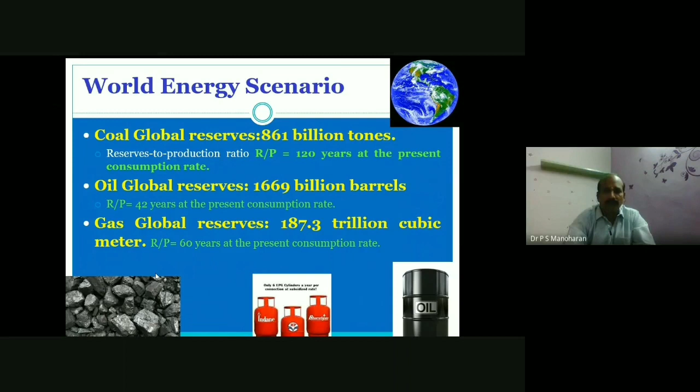And what about the oil reserve? 1669 billion barrels. The reserve to production ratio is only 42 years. Gas is 187 trillion cubic meters. The reserve to production ratio is only 60 years. So after 120 years, there is no coal in hand. After 42 years, there is no oil. After 60 years, there is no gas in hand.

So what about our Indian scenario? The reserve of coal in our India is only 7% at the global level. The coal reserve: United States having 28%, Russia having 18%, and the rest of the world 20%. Our India only 7% we are having. And world oil reserve: Middle East 50%, and South America and Central America 20%, North America 20%. What about our India? Only 0.3% we are having oil reserve.

In Asia, only 3%. In that, India only we are having only 0.3%.

But we are using more energy. So India is the fifth largest energy consumer in the world. First is US, next China, Japan, Russia, and the fifth one is India.

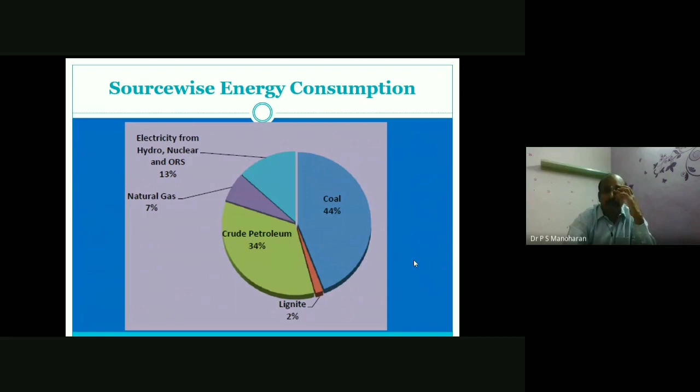Now we are having 44% thermal coal energy, 34% oil, and 20% renewable energy. That is shown here: coal 44, petroleum 34, natural gas 7%, and electricity from nuclear, hydro, and other renewable sources is 13%.

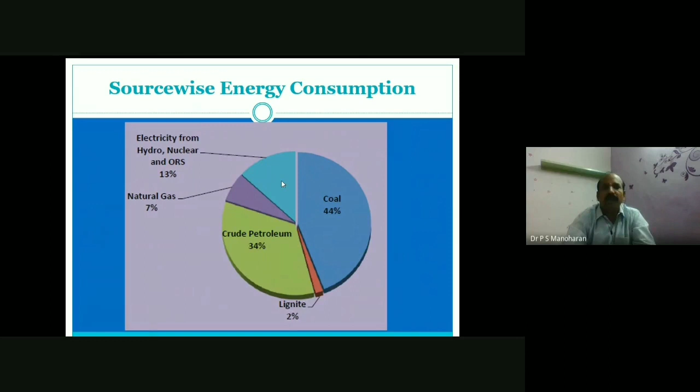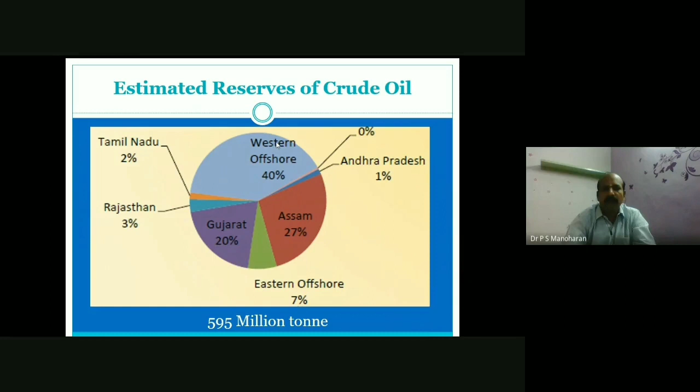Estimated reserve of coal in India is 319 billion ton only, and estimated reserve of crude oil is 595 million ton. In Tamil Nadu only 2% we are having. Most of the oil is in the western offshore, and Tamil Nadu has only 2%.

What about the estimated reserves of natural gas in India? In the eastern offshore, 38% of 1340 billion cubic meter, and in Tamil Nadu we are having only 3% of this.

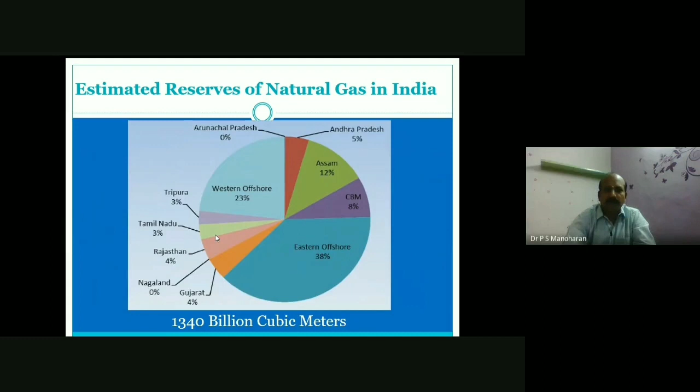So what is the meaning of this scenario? We are having very less oil, very less coal, and very less gas in India. On the 280 gigawatt power, 200 gigawatt of thermal we are using, and renewable energy is a very less amount. In that renewable power, we have solar energy 68% and wind energy 28%, and other small hydropower, biomass, cogeneration is only 4%.

But what about our Indian power demand? Every year it is increasing. This is a growing country, so automatically our demand also increases every year.

Who are the consumers of electricity in India? Total consumption is 11,30,244 gigawatt hour. Most of the power is used in industry only. Second is domestic, third is agriculture, then commercial, traction, and other sectors consume 6% of the energy.

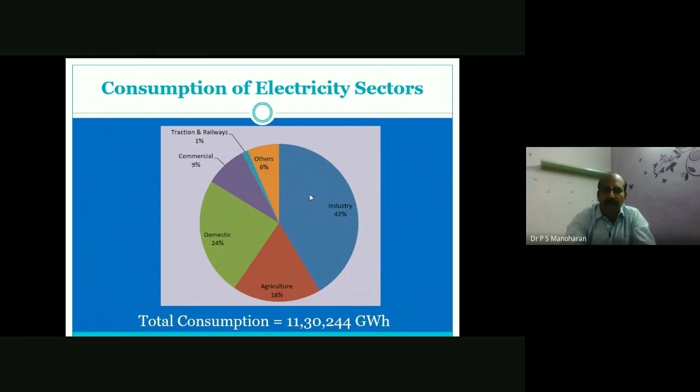So now the demand is high, but the electricity generation fuel is very less. So what can we do for that? Why do we need to save energy?

If you are not saving energy, automatically the petrol and diesel price increases. In the lockdown period also, the petrol and diesel price is now increasing. And the depletion of fossil fuel - petrol, diesel, and coal. The third one is electricity prices rise, because of oil, automatically electricity price also rises. And we feel the shortage of energy also.

In power cut regions, you cannot study, you cannot work. Anything is not possible without power. So this is the energy outlook in India. India has 17.5% of global population, but only 0.5% of world petroleum reserve, and only 7% of coal reserve. So we have to save the energy and save the fuel.

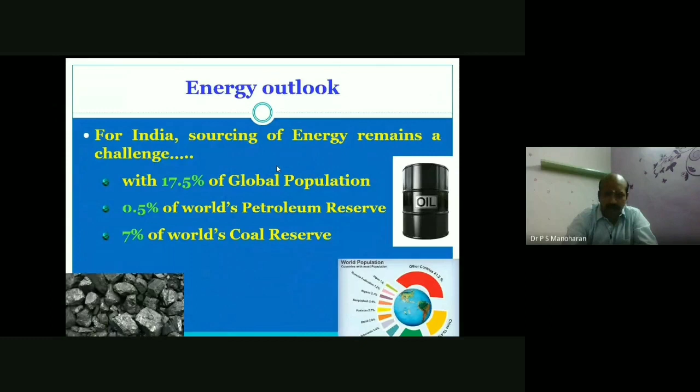So if you are not saving the energy, you have to face global warming and electricity price hike. We have to see one by one. The first one is global warming.

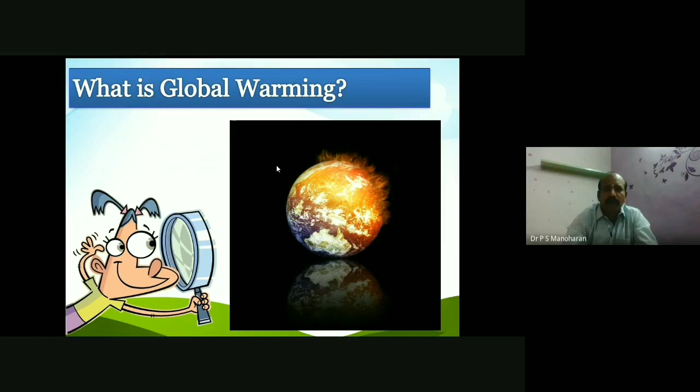What is global warming? It is the increase in the average temperature of the Earth's surface. Why? Carbon dioxide and other pollutants and greenhouse gases collect in the atmosphere and absorb sunlight and solar radiation that have bounced off the Earth's surface. Normally this radiation would escape into space, but these pollutants and carbon dioxide trap the heat and cause the planet to get hotter.

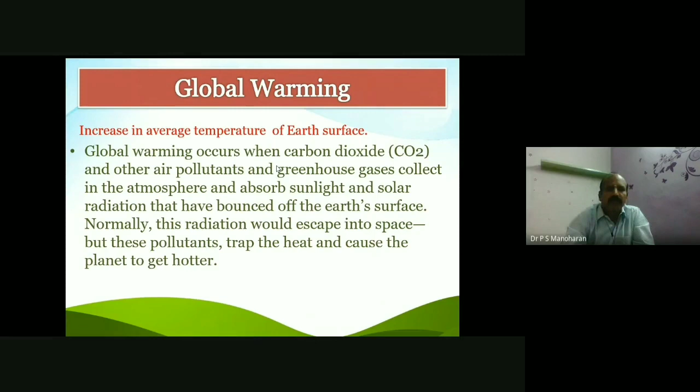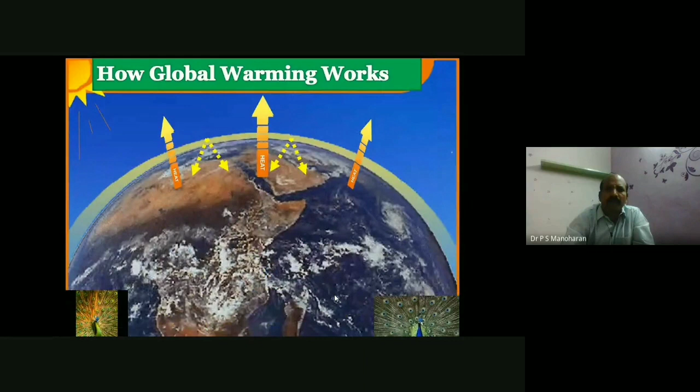Why? The pollutants come from coal, natural gas, industries, and cars. When we burn fossil fuels, automatically the pollutants increase, so it doesn't radiate, and automatically the heat will increase in our earth.

Due to this temperature increase, we are facing so many problems. This is one example of the greenhouse effect: imagine you close all the windows of your car, and the sun's energy passes through the car's windshield. The heat is trapped inside the car and cannot pass back through the windshield, causing the temperature inside the car to increase automatically.

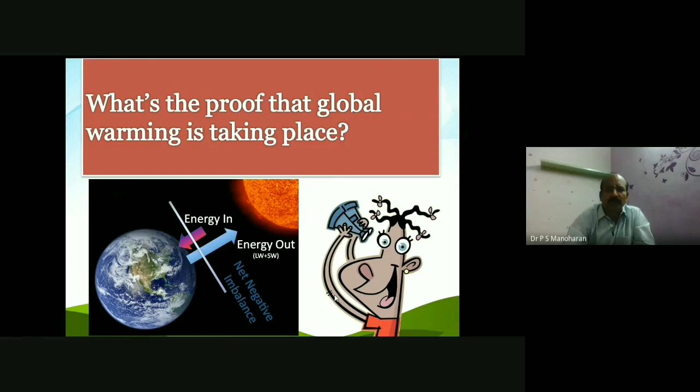So due to global warming, the heat is increasing, the temperature is increasing. Is any proof there? Yes, this is proof. We are going to see 4 or 5 proofs here.

The second example is the Arctic in 1980 and 2012. Due to the effect of global warming, air and water temperature is increasing, which melts the ice and raises the sea level.

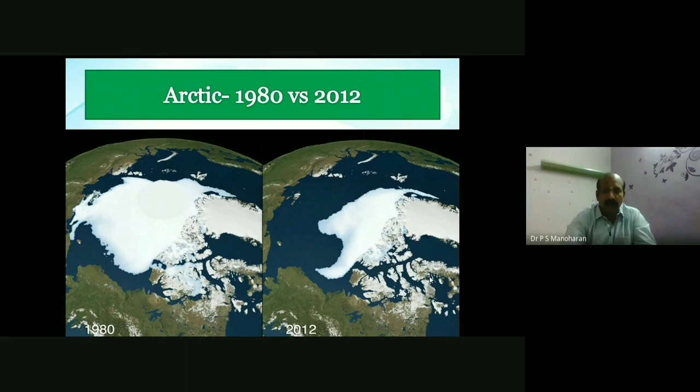What can you do to help solve this problem? We can save energy, and automatically we can solve the problem. So save energy to save the earth. It is a social problem.

So we can avoid global warming, acid rain, snow meltdown, and sea level rise. So what is another idea? How can we reduce our emissions? We can go for renewable energy sources, solar energy, wind power, and we can use electric vehicles. So we can save energy.

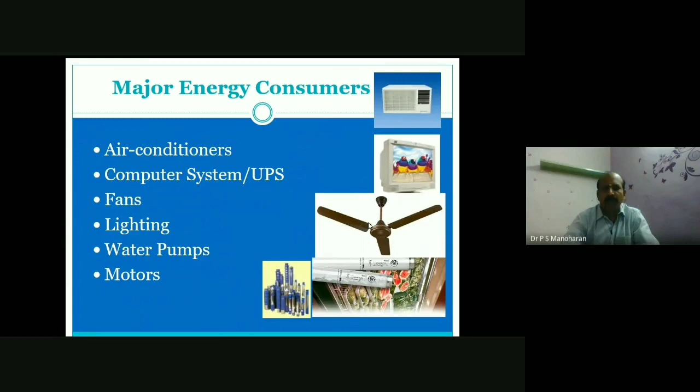Major energy consumers in your home, institution, or office are air conditioners, computers, computer UPS, fans, lights, water pumps, and motors. In industries, they are using so many drives and motors. Now we can see one by one how we can save energy, how we can conserve energy.

The first one is air conditioners. In air conditioners, you have to always measure the temperature of supply air and return air, and compare it with a peer one. You have to measure all the ACs and find out which is a good one or bad one. So you have to find out, and prefer to use split air conditioners instead of window AC.

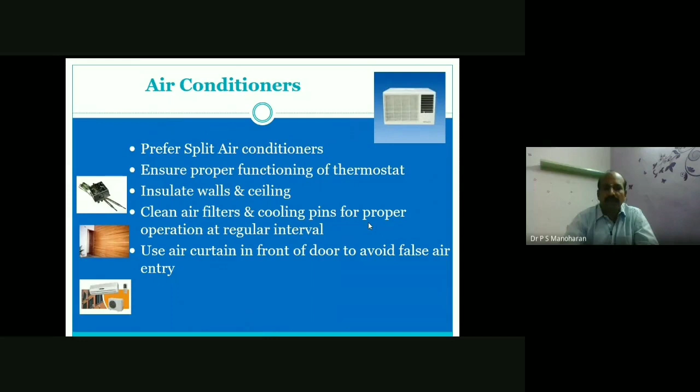Ensure proper functioning of the thermostat in the AC. Insulate all the walls and ceiling. Clean air filters and maintain the AC at regular intervals. Use an air curtain.

For the ideal temperature in India, you can set 24 degrees, that is enough. In the summer, you can decrease 1 or 2 degrees. That's all.

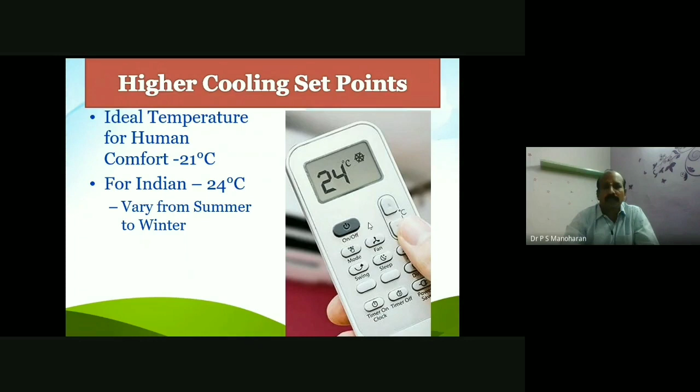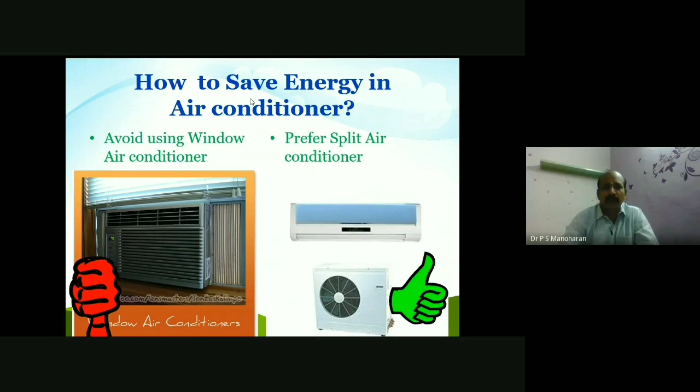So when you are using the split air conditioner instead of window air conditioner, you save energy. Why do we prefer split air conditioners? Window AC consumes 1.5 times more current compared to split AC of the same capacity. They have poor efficiency with high grill temperature, which makes them run longer to make the room cooler.

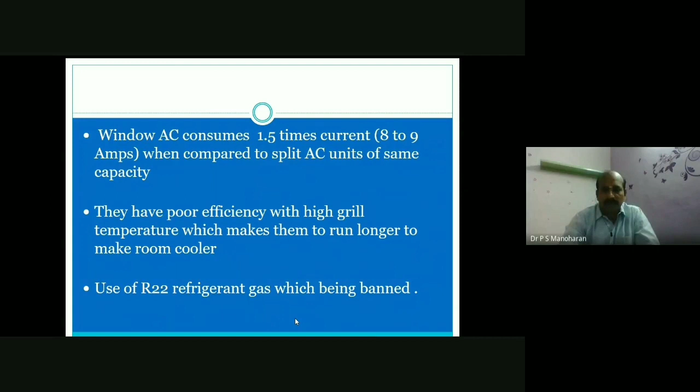And now use of R22 refrigerant gas is being banned in India. In window ACs, they are using R22 refrigerant gas, that is why we recommend going for split AC. Air leakage is also very important, so seal all air leakages in windows and doors. You can use an air curtain. You see this type of air curtain in malls, jewelry shops, and cinema theaters.

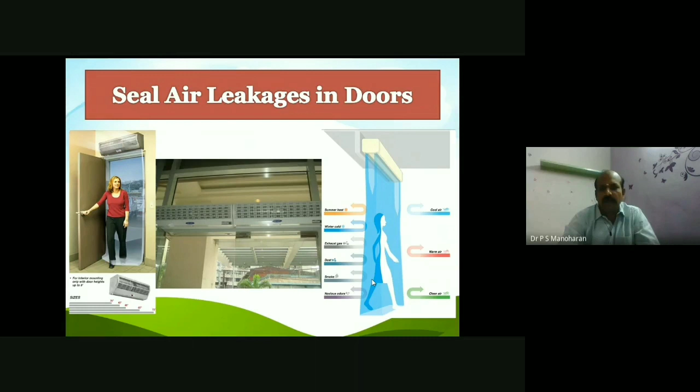The next one is the computer, because now most software companies use computers. They use two types of UPS, online UPS and offline UPS. Switch off the UPS during non-use periods. When you switch off both online and offline UPS, you can save more energy.

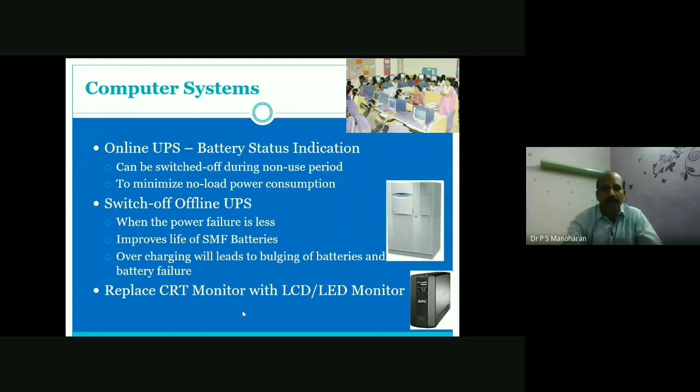The second point, we know very well, is to replace the CRT monitor with an LED monitor. A computer that runs 24 hours a day uses more energy than a refrigerator. If your computer must be left on, turn off the monitor, because this device alone uses more than half of the system energy.

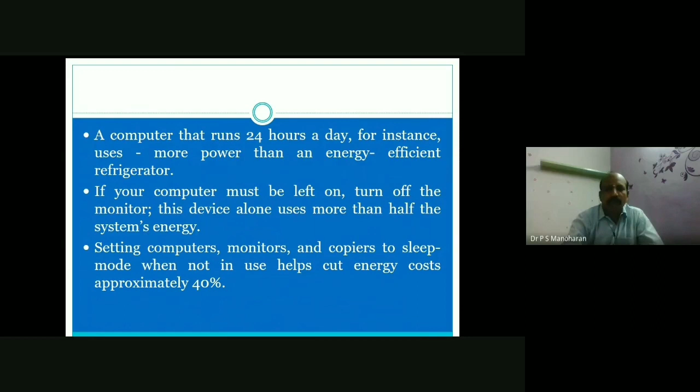Therefore, set the computer's monitor to sleep mode when not in use, so automatically you can save more energy. This is our recommendation for the power saving mode of computers.

Set the sleep mode of the monitor to 3 minutes, sleep mode of the hard disk to 10 minutes, and the processor sleep mode to 15 minutes. You can set this timing so automatically it will go off and you can save energy.

The next one is the ceiling fan. Fans consume 60 to 70 watts of power in houses, offices, and industries. In all places we are using fans. Now, for energy conservation, you can use energy efficient fans, that is the BLDC fan.

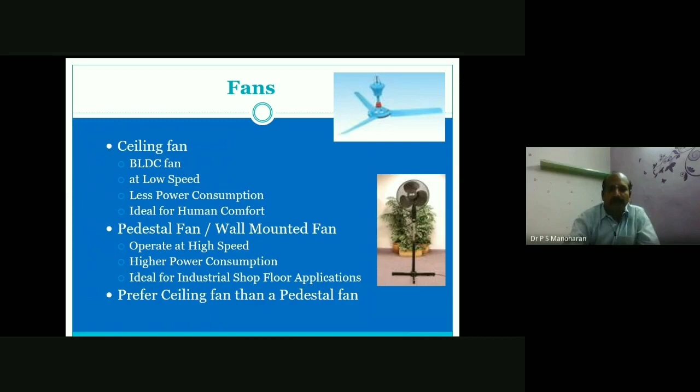The next point is preferring the ceiling fan over a pedestal fan. Pedestal fans consume more power. The second point is to replace conventional resistive regulators with electronic regulators for ceiling fans.

The resistive regulator consumes more power than the electronic regulator. A conventional resistive regulator consumes 10 watts, whereas an electronic regulator consumes only 1 to 2 watts.

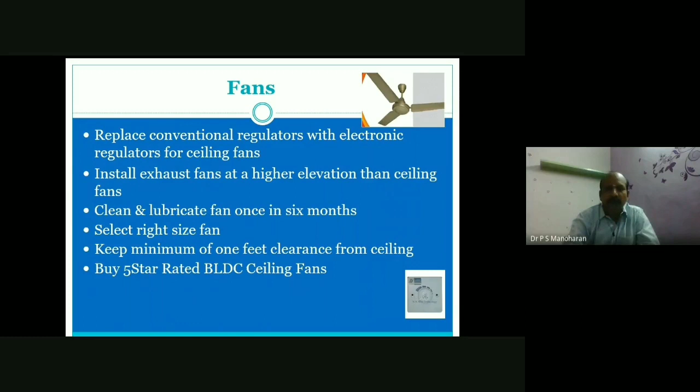Install the exhaust fan at a higher elevation than the ceiling fan, and maintain the fans at regular intervals. Use the correct size of fan for the correct room size, and always keep a minimum 1 feet clearance from the ceiling. Use an energy efficient fan; a 5-star rated BLDC ceiling fan is recommended.

These are famous companies in India: Superfan, Gorilla, and OCCO.

Now I want to show one video. I present a video for the BLDC fan and one video for the HVLS fan.

So this is a BLDC fan. We can use the remote to operate it. It has an on button and an off button. For speed regulation, it has settings 1, 2, 3, 4, 5. A timer is also available.

You can set the timer for 1 hour, 2 hours, 3 hours, and so on. It has speed regulation, and you can use the turbo function if you need high speed.

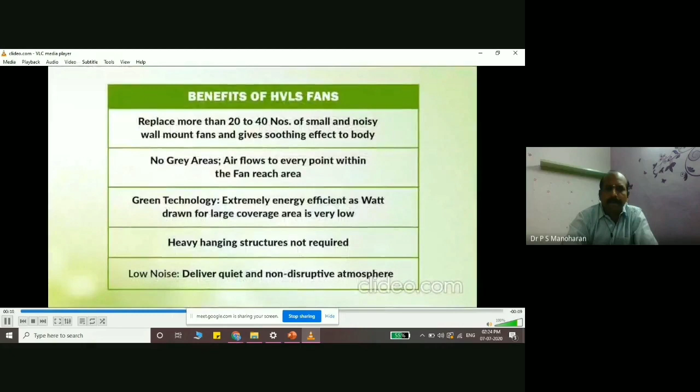HVLS fans are used in industries, auditoriums, and big halls. The size of this fan ranges from 16 feet to 24 feet. It covers an area of up to 2000 square feet, but the consumption is very, very less, using a 1.5 HP or 2 HP motor.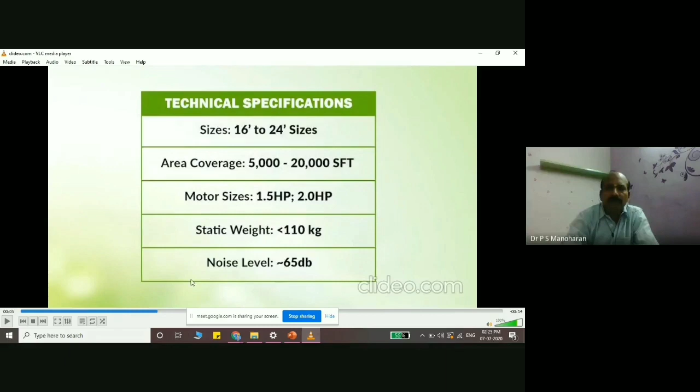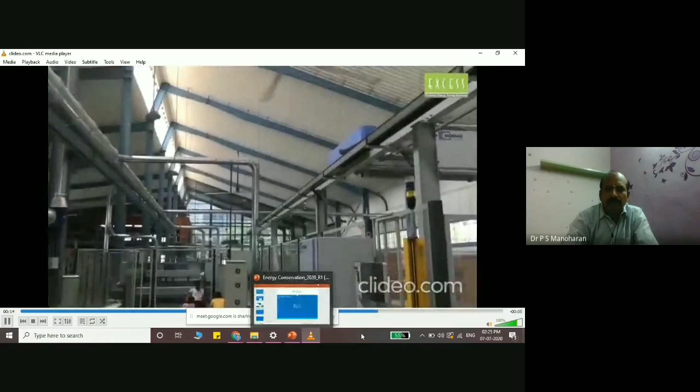Now we can see how to calculate the payback period. The cost of the energy efficient fan is high, around 2,800 to 3,000, but you can get the payback within a year or 1.5 years.

For example, 100 numbers of 65 watt conventional ceiling fans in an industry are replaced by 35 watt energy efficient fans to reduce the energy bill. BLDC fans are available with 28 watts, 30 watts, and 35 watts depending on the company, and the cost is around 2,800 to 3,000.

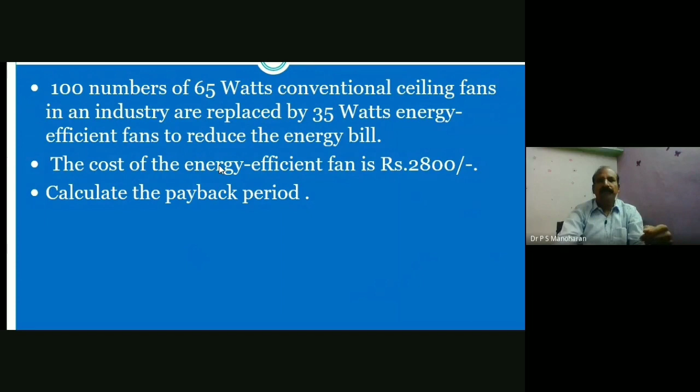Now we are calculating the payback period. Taking the power consumption of the conventional fan as 65 watts, and the energy efficient BLDC fan as 35 watts, the power saving is 30 watts per fan. Energy saving per day is 30 watts multiplied by 20 hours.

This is for an industry, that is why I am taking 20 hours. So that gives 600 watt hours. Energy saving per month is 600 watt hours multiplied by 30 days, giving 18,000 watt hours. Converted into kilowatt hours by dividing by 1000, that is 18 kilowatt hours, or 18 units per month.

Total energy saving for 100 fans. We are calculating for 100 fans, and that is coming around 1800 units. So energy cost per month, we are paying 10 rupees per unit tariff rate in the industries.

For example, that is why 18,000 cost is saved per month. Now what is our investment? We are investing 2,800 per fan for 100 fans, that is 2.8 lakhs invested for the new fans. So calculate the payback period: 2.8 lakhs divided by 18,000 energy saving. Approximately within 15 months you get the payback, and after that it is free. So we are saving energy very well.

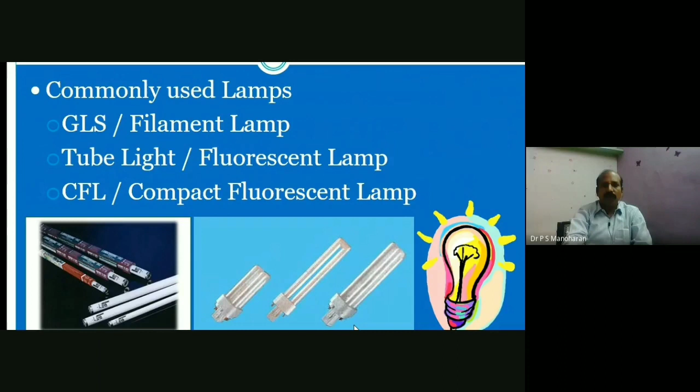Next we can go for lighting. We are using the filament lamp, fluorescent tube light, CFL and LED nowadays. In lights, lumens per watt is very important. The conventional tube lights are 68 lumens per watt and 5-star tube lights are 90 lumens per watt. If you are purchasing a China product LED tube light or bulb, the lumens per watt is very low. The cost is less, but it is not a warranty product, and lumens per watt is very low. That is why you have to buy the company product.

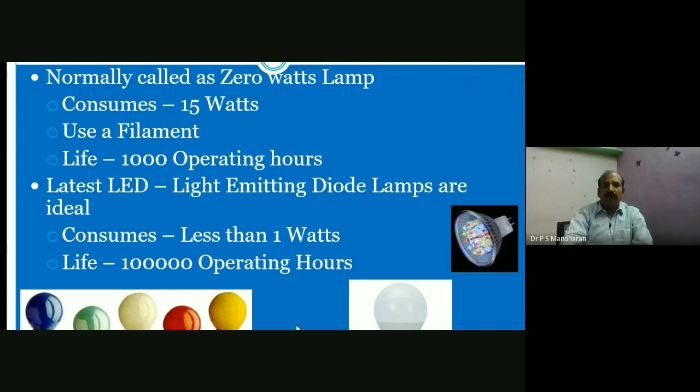Next point, we use a 0 watts lamp in the bedroom, bathroom and puja room, but actually this 0 watts lamp consumes 15 watts. This is a filament lamp, and the operating hours is very low. Instead of this 15 watts filament lamp, you can use a 1 watt or 0.5 watt LED lamp. The operating hours is also very high compared to the conventional filament lamp. So in your house, if you are using this 15 watts filament lamp, please replace it with the 1 watt or 0.5 watt LED.

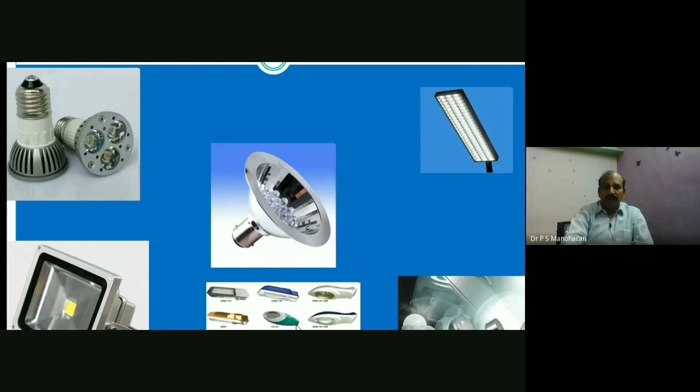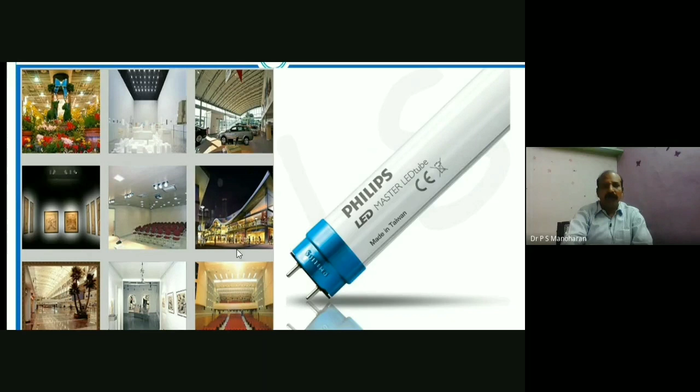Not only tube lights, we are using LED street lights and LED focus lights in all places. Now most of the corporations have replaced them with LED street lights. So not only tube lights, in all decorative lights we are using LEDs.

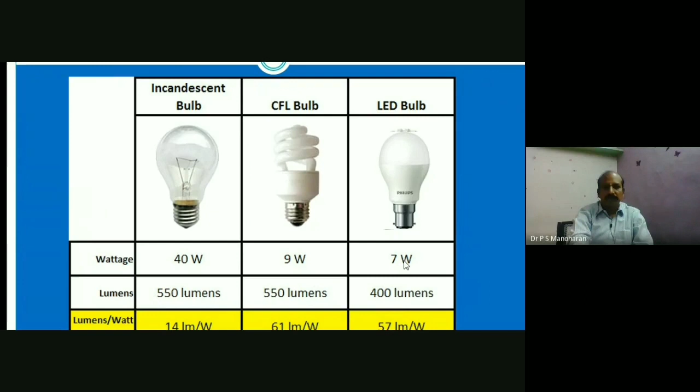So we can use the LED lamp in place of CFL also. Now in most electrical shops, CFL lamps are not available nowadays, so they are only selling LED lamps. So use LED tube lights, company product tube lights. Use a mirror optic reflector in the office lamps and periodically clean it.

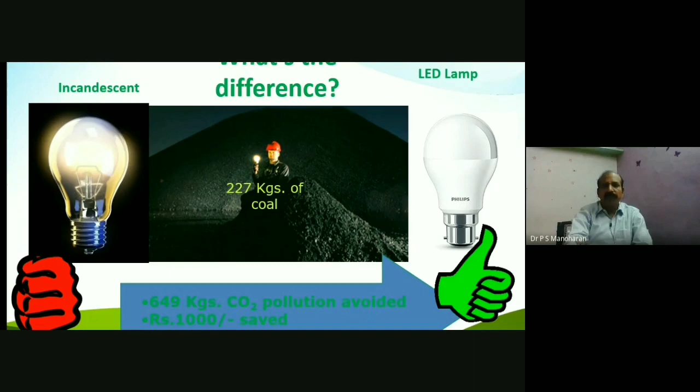Wall paint color used in rooms is very important. A dark paint reduces the illumination level, so try to use maximum sunlight. If you use the LED lamp instead of the incandescent lamp, you are saving energy. At the same time, you are avoiding carbon dioxide pollution, saving fuel, saving energy cost, and helping the nation also.

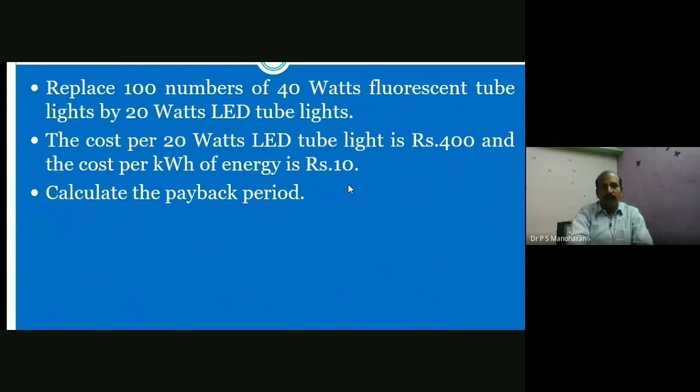So now we can calculate the payback period for the LED tube light. Taking 100 numbers of 40 watts fluorescent conventional tube light, replaced by 20 watts LED tube light. The cost of this LED tube light is 400 rupees. The energy bill cost per unit is 10 rupees. Now calculate the payback period.

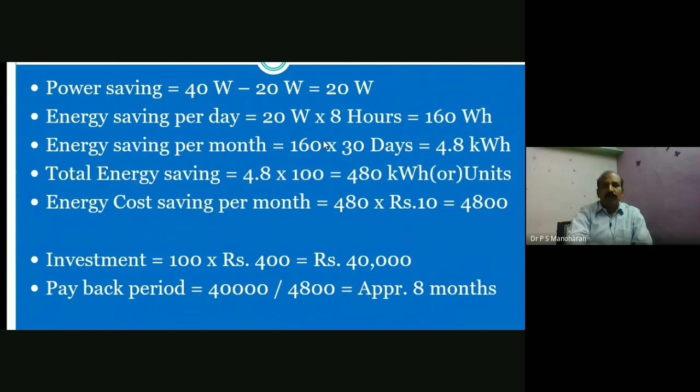What is the power saving? Conventional tube light is 40 watts and LED bulb is 20 watts, so the power saving is 20 watts. Taking 8 hours duration, 20 watts into 8 hours is 160 watt hour, that is the energy per light. Calculate the energy saving per month for 30 days, it is around 4.8 kilowatt hour.

That is 4.8 units. Now calculate for 100 tube lights, it is around 480 units. So energy cost saving per month, at 10 rupees per unit, 480 kilowatt hour multiplied by 10, gives 4,800 rupees saving.

But now we are investing more amount. We are investing 400 rupees per tube light, and purchasing 100 tube lights, so it is around 40,000. The payback period is 40,000 divided by 4,800, so approximately within 8 months you get payback. After 8 months it is free, the energy cost is 0.

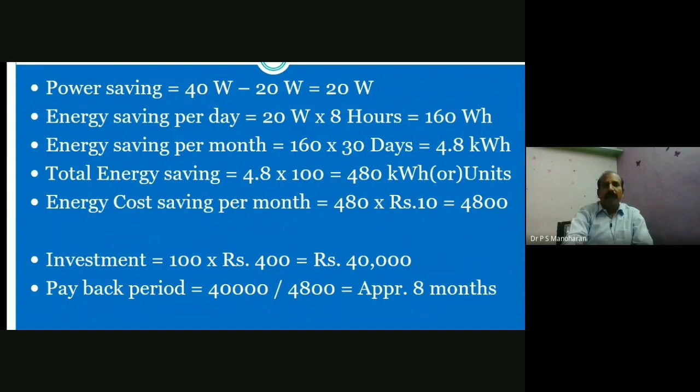So if we are purchasing a BLDC fan, energy efficient fan, energy efficient tube light, or energy efficient AC, the investment is somewhat high, but you can get the payback period within a year surely.

So the next point is you can use lighting control. Automatic lighting control is possible using the PIR sensor, occupancy sensor, and timer control is also available. All the street lights are on and off by timer control only. You can use a photo control switch, and a dimmer can be used in hospital laboratories.

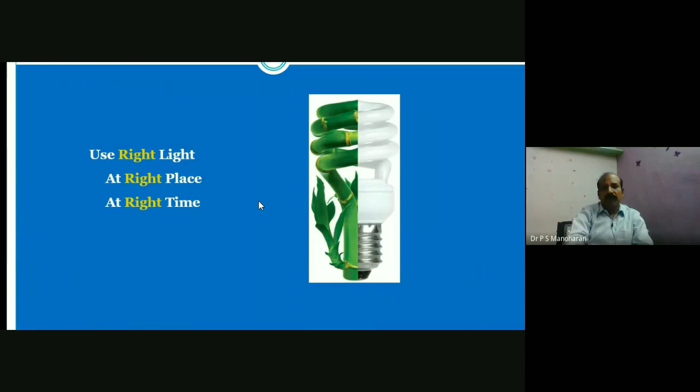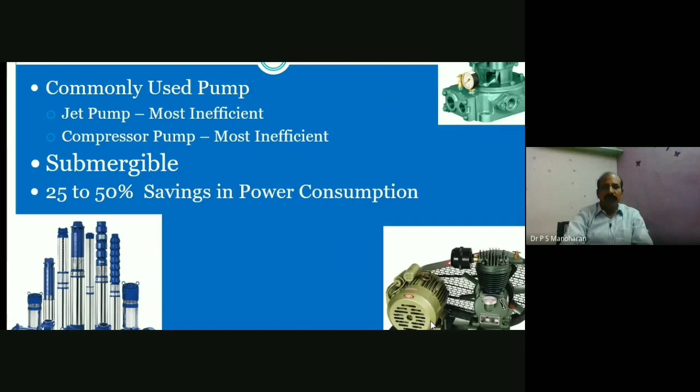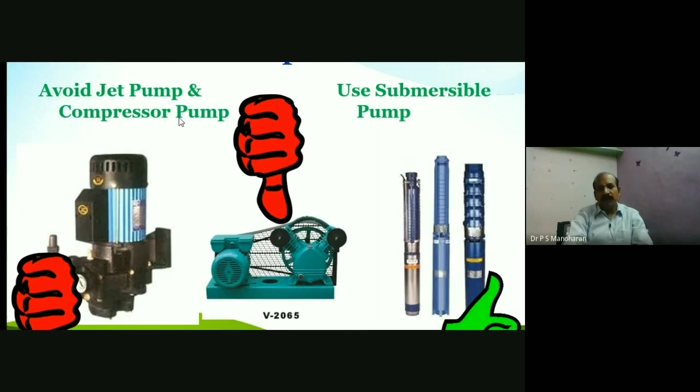Next we are going to see some electrical appliances - geyser, pump, refrigerator, and so on. In electrical pumps, commonly we are using the jet pump. This is a jet pump and this is a compressor pump we are using, but these are inefficient. Instead, you can use a submersible pump and save 25 to 50% of power. So instead of jet or compressor pump, use a submersible pump - you can save more power.

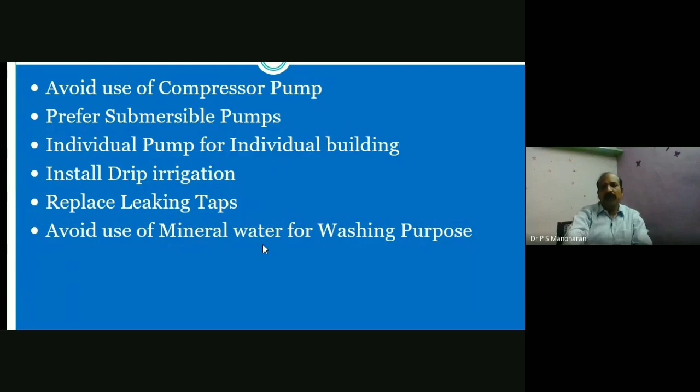If drip irrigation is possible, install the drip irrigation and install a new individual pump for the individual building, and replace any leaking taps. You can conserve water and at the same time conserve power also. So avoid using mineral water for any washing purpose; use it only for drinking purpose.

Install an automatic water level controller in the water tank. In the water tank, the float is there. When the float reaches the particular level, automatically the electronic relay works and switches off the water pump. So when you use the automatic water level controller, you can save water and at the same time save power also. You can use this water level controller in all places - home, offices, industries, everywhere.

So next is the refrigerator. Our recommendation is to purchase a star rating refrigerator, and cool food to room temperature before keeping it in the refrigerator. Check the gasket lining for damage or leakage, check the functioning of the auto defrost control, and the cooling pins should be kept open subject to free airflow. Leave enough space between the refrigerator and the walls so air can easily circulate around the refrigerator and the temperature outside will decrease.

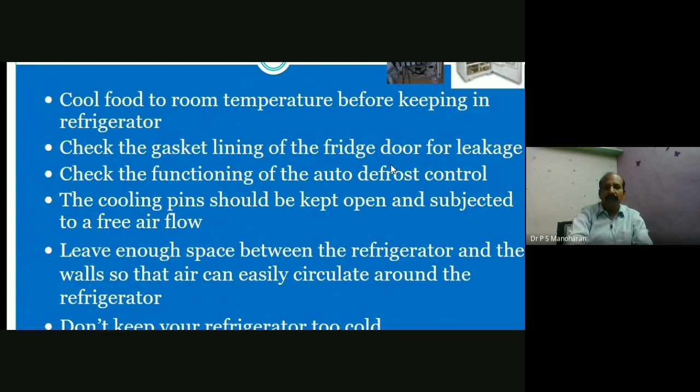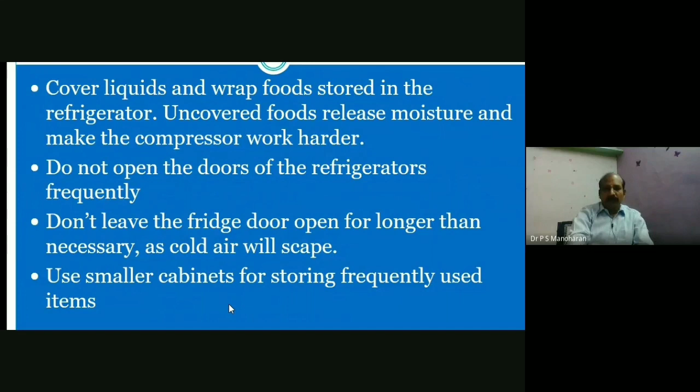Don't open the door frequently, and don't leave the fridge door open for a long time. Use smaller cabinets for storing frequently used items. And the main recommendation is to purchase a star rated refrigerator or star rated washing machine also.

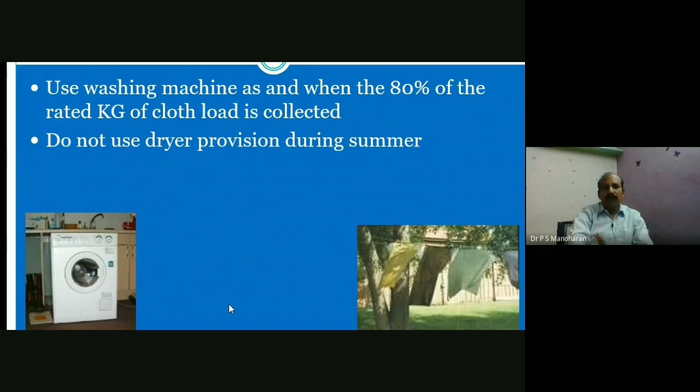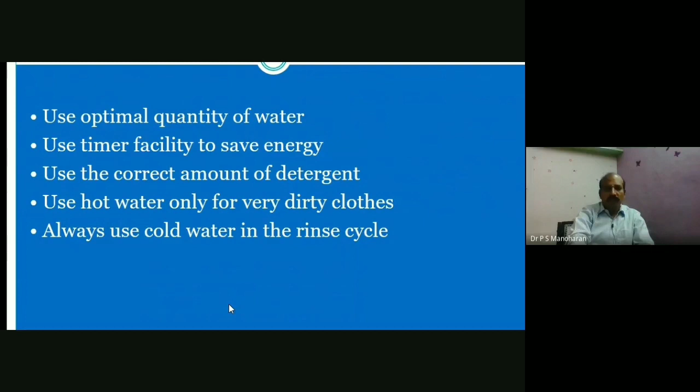Use the washing machine with full load or 80% load. Don't use the dryer in summer. Use the optimal quantity of water, and the timer facility is very useful to save energy. Use the correct amount of detergent - if you use a large amount of detergent, automatically water consumption is high and power consumption will increase. So use hot water only for dirty clothes, and always use cold water in the rinse cycle.

The next one is the water heater. We know well that we can use a solar water heater instead of a filament water heater, and you can get payback within 2 or 3 years definitely. Maintain this water heater at regular intervals - descale the water heater vessel once a year and check the thermostat.

You can install a combined electric filament heater and solar water heater. In summer, the solar water heater works well. In winter, the insolation is somewhat less compared to summer, so automatically the filament water heater will turn on, consuming energy to give hot water always. The sun rays increase the temperature up to a level, say 60 or 70 degrees Celsius, but your setting point is 90 degrees Celsius, so automatically the filament will turn on. So when you use both, you can get hot water regularly.

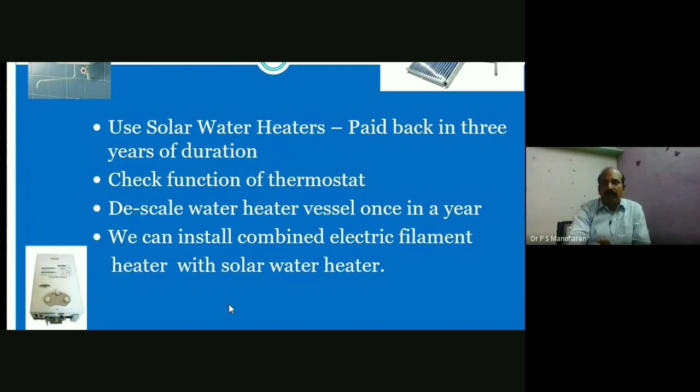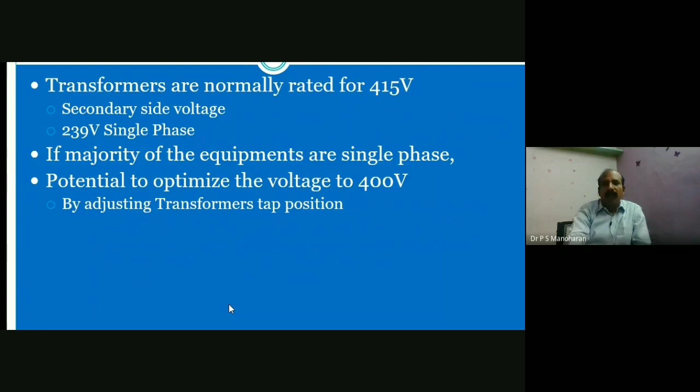Another recommendation: regarding the voltage maintained in the transformer, we need not maintain the voltage at 415 volts. You can optimize the voltage level depending upon the appliances used in your industries—this is not useful for the home. In industries or institutions, when we adjust the tap position in the transformer, we can decrease the voltage level and conserve more energy.

Now about Energy Star labeling. The Energy Star rating is a Government of India initiative to promote energy conservation in India, started in 2006. The Energy Star rating applies to all electrical appliances like refrigerator, tube light, AC, fan, induction motor, pump set, geysers, transformer, and TV, with ratings of 1 to 5 stars. The label denotes the rating and also the energy consumption per year. It is an international standard for energy efficient consumer products—a trusted government-backed symbol for energy efficiency, helping us save money and protect the environment through energy efficient products and practices.

The Energy Star labeling describes energy performance in terms of energy use and energy costs. The label gives consumers necessary information when purchasing equipment. There are two types of labeling: the comparative label and the endorsement label. The comparative label allows consumers to compare the energy consumption of similar products and factor lifetime running costs into their purchasing decision. The endorsement label provides certification to inform prospective purchasers that the product is highly energy efficient for its category.